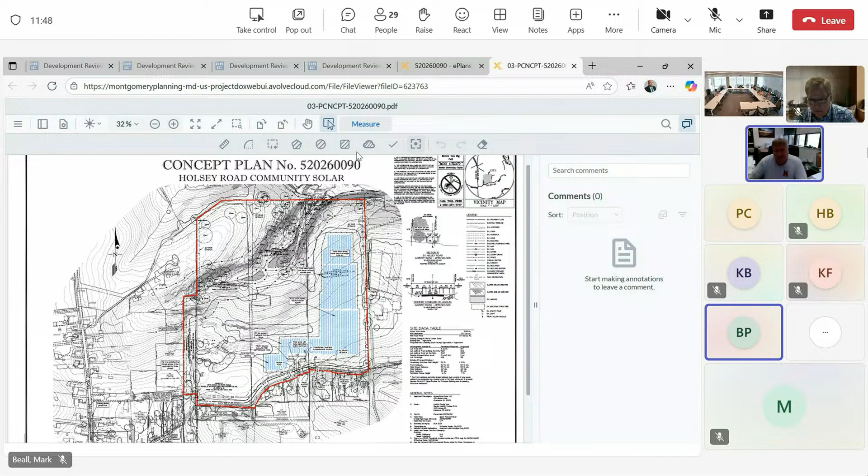This is Brenda with DOT. I think more than anything, this is just a clarification of what is existing. I don't think that you need to dedicate more; however, you do need to show a swale. It's just that the cross section that was provided was a little bit confusing.

Kevin, Keith, any questions about that? Yeah, we were just trying to clarify what was going to be required of us as far as dedications or anything else along Holsey Road. So I guess the question is, are we going to be required to dedicate right of way or not?

This is Rebecca from DOT. Is the road in the right of way? Currently, there is no right of way out there. All of the road is either on our property or on adjacent lots, but it's all prescriptive out there. So, well, two things: it's supposed to be a public roadway. Yes, so yeah, it is.

And so for it to be a prescriptive right of way, the county would need to take action, according to our attorneys. We would request that you provide the road in right of way along with a swale, so that if in the future DOT or anybody has to do improvements in that area, we have the right of way and the water is within right of way.

For DRC, it's a pre-preliminary plan in Up County, the Margaret M. Rast Trust property. Jonathan Casey will start.

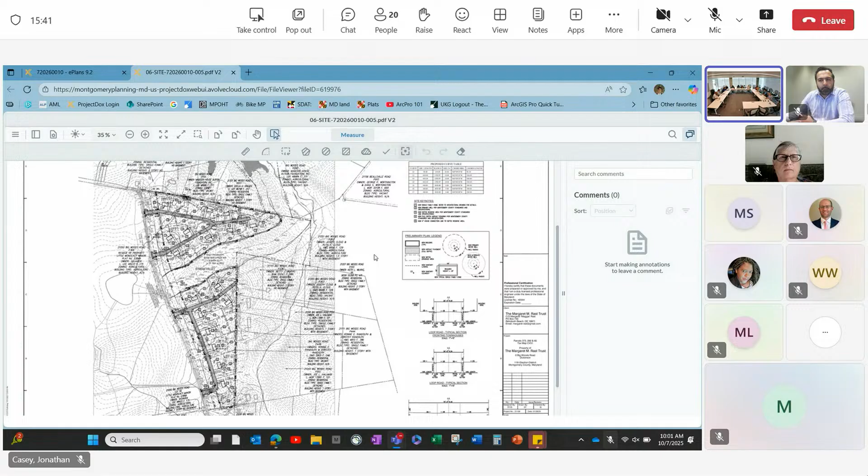Good morning, I'm Jonathan Casey with Up County. Just covering the basics, this is a pre-preliminary plan, but as we discussed on the phone, you're basically just looking for this kind of a feasibility study, looking at how many units you can potentially build here. We did have fairly significant comments on the layout, and I'm not sure you got all of them. We've been experiencing technical difficulties with E-plans, and not all of the change marks showed up on the PDF you received, so I'm not sure if you actually received all the comments.

There are a number of comments on sheet 5 from me that did not show up on that summary sheet. So if you want to start with reviewing the other agencies, perhaps DOT would like to get us started. Actually, I was hoping Mark Etheridge could. Or we can start with Mark Etheridge.

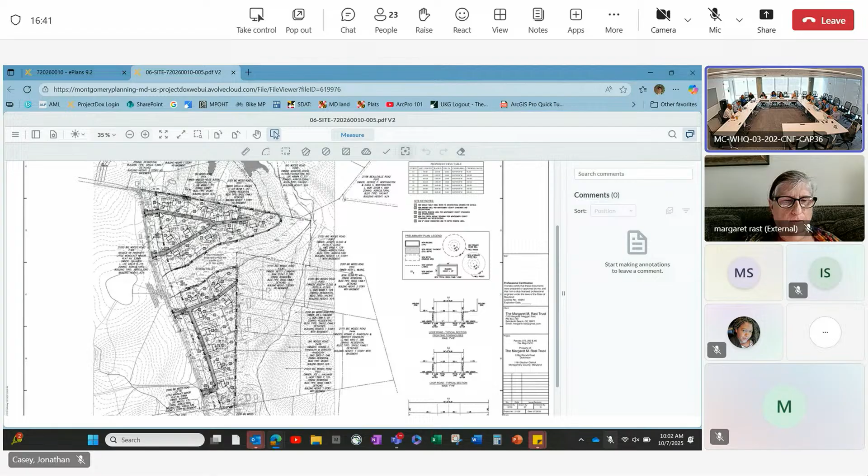Hey, this is Andrew Kohler. I don't think Mark's on today, but I can jump in for him on behalf of MCDPS Water Resources. So the layout for the stormwater management is problematic with the setbacks for the wells and layout. It will be difficult to provide full stormwater management based on that information shown, so that's significantly problematic. Thanks.

Do we have a well and septic on the line? Yes. There are a lot of updates that'll need to be made for well and septic.

I'm in the process of reviewing EMAD's last submission for water table testing, so I'll need to get some remarks back to him probably before the end of this week for a revised plan to be sent in. That's something that's kind of holding things up because the water table tests, well, more water table tests will need to be done, but they can't be done until early spring when wet season opens back up. Right now we're just in the process of trying to get a plan approved that will work, that shows potential SRAs, septic reserve areas that could be used, so that I can mark water table tests accordingly for that.

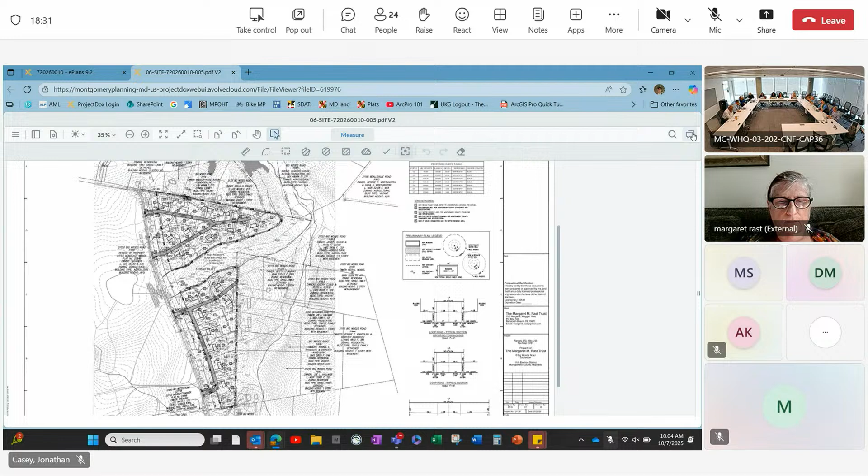Thank you. Marie? Do you just want me to report my comments? Yes, ma'am. Okay.

So as submitted in E-plans, I do need you to dimension pavement width and radii. The biggest thing on this is that you have dead ends greater than 150 feet without compliant turnarounds. You can send me a sketch or an email and I'll return a sketch on what those turnarounds can look like. You're always free to email me and I will return reviews, there's no fee associated with that. Your radii at your aprons for connecting to the main street appear to be inadequate.

I'm looking for at least 25 feet or a 35-foot driveway apron, depending on if you're doing private streets, you'll actually need the 25-foot radii. And then for water supply, you will be required to install a minimum 30,000 gallon tank with dry hydrant to serve this property, so that needs to be laid out. Again, feel free to reach out anytime and I'm happy to return reviews.

Thank you. DOT: you cannot do curb and gutter out here, it has to be swale. And you need to use the complete streets requirements.

Technically, you need to provide turnarounds for all roads, even if they're private. And I don't recommend the design, the additional roadways that you show just seem excessive for this area. So once you factor that in, a tertiary roadway is probably around 64 to 74 feet, depending on if you have sidewalks, per county road standard.

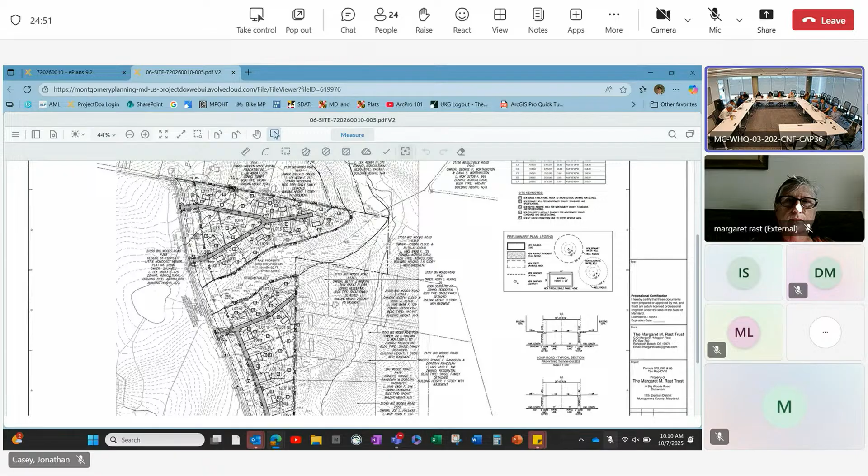If that makes sense. Yeah, and there's nothing keeping you from submitting another concept. Submit another pre-preliminary plan, unless you want binding advice from the board, or non-binding advice. A concept plan is your best route as far as processes moving forward, if you just want to bounce things off of the agencies. Also, the comments that didn't show up - if you go into each plan, you'll see a little red exclamation point. If you click on that, those comments do show up. Perfect, okay, understood.

This is Doug Johnson, environmental planner. I just need to highlight that since these lots are really constrained, you have to keep in mind that the septic fields cannot be within the stream valley buffers. Got it, thanks.

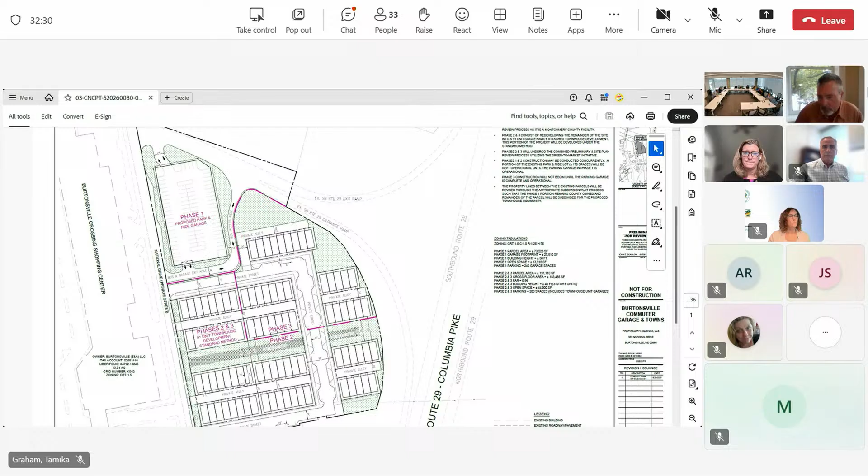Hi, this is Carlos from Planning and Transportation Plan Division. I think we still need to see some of the AutoTURN diagrams to make a more cohesive assessment, and an internal conversation is going to be needed to figure out the best possible design. There are several elements here that create a lot of very problematic conflict points between bus traffic, regular traffic, and potential residential traffic.

So, not to take too much time out of the meeting, but I would say that as it is currently designed right now, it is problematic just because of the creation of all of these conflict points, and also pedestrian conflict points.

This is Richard Brockmeyer. I'll just add, I think part of it would be understanding the dimensions of how they're being separated, and the crossing for pedestrians across that area. I understand trying to keep the width down, but also what is that dimension? Is there a refuge?

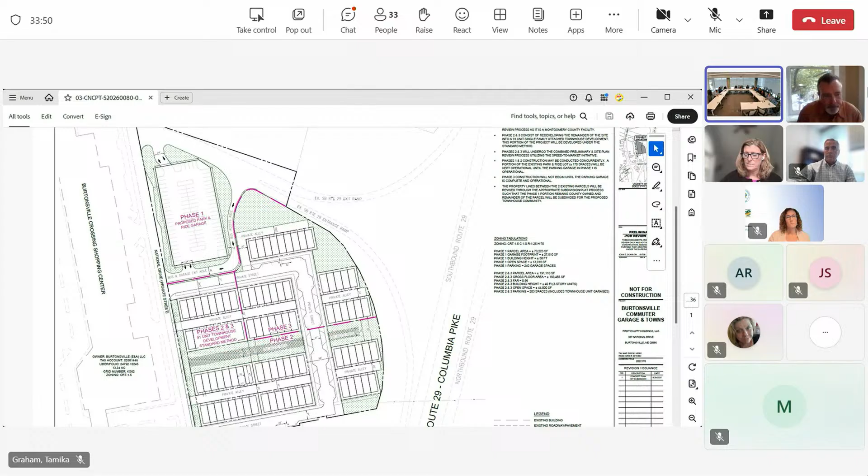So I think probably further discussion on that. Also, will there be a crosswalk as well too? I think I do see a pedestrian crossing between the towns and the garage, but how is that related to how will that navigation be visualized effectively?

Okay, that's helpful to understand. Aaron, just very briefly, I just want to clarify the noise analysis is needed at the time of subdivision because it would influence the layout of the lots. Yeah, and we're intending to do a joint preliminary plan and site plan.

And if I can just circle back on one item too, and this relates also to fire access. Please include us on the conversations if they relate to design for fire access, because I think it overlaps with our concern about the internal bulb outs for parking as well. We do think that the current design is a little problematic in terms of turning movements and also internal navigation for emergency vehicles within the private streets in relation to the fire access route as well. So, yeah, we just want to make sure that we're also hitting that point as well.

Yeah, and I actually, you're right, I had the bulb outs on my notes. Jack can speak to it. I think we're fine taking out the bulb outs. And then we were talking yesterday about improving the turning, because we did get that comment from Marie. Yeah, so we know that's something that we'll be working on.

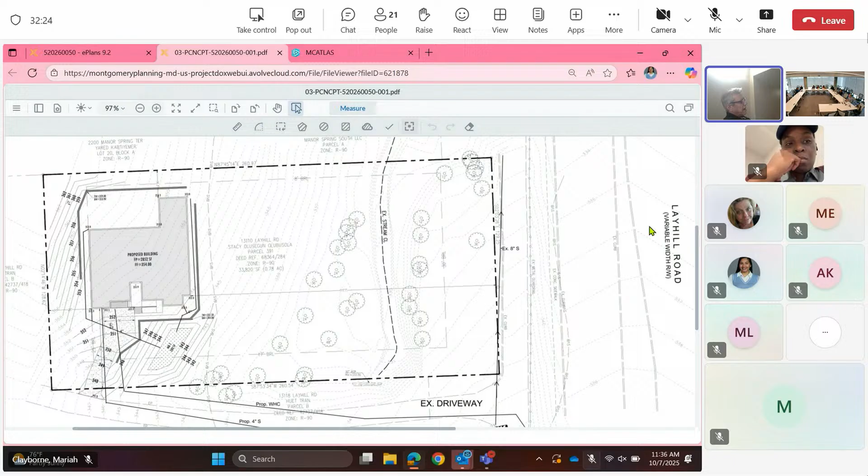I don't think well and septic would work on this project anyway. With the zoning categories W1, S1, it might require an extension, or the water house and sewer house connections will have to be extended to the line near Layhill Road, but that's kind of what I was thinking, that's how we would have to do it.

This is WSSC - yes, it's partially in the correct category. It's water and sewer category 1, so they can get connection to the public system. And yes, you'll need an extension, especially for water.

Yeah, we can't really hear you. Is it possible to clear the mic so the comments can be clear? Could you please repeat your comments? We had a hard time hearing you. Can you hear me now?

Yeah, much better. I was trying to see what is wrong with the microphone. There you go, yeah.

This parcel is in the right category - water and sewer service category 1, so they can get service from WSSC. For the water I think we need an extension. For the sewer, I will need to confirm that it's going through a WSSC easement, because you will need to cross a small part that I think is private. So I don't know exactly how we will do the sewer house connection, but you can do it.

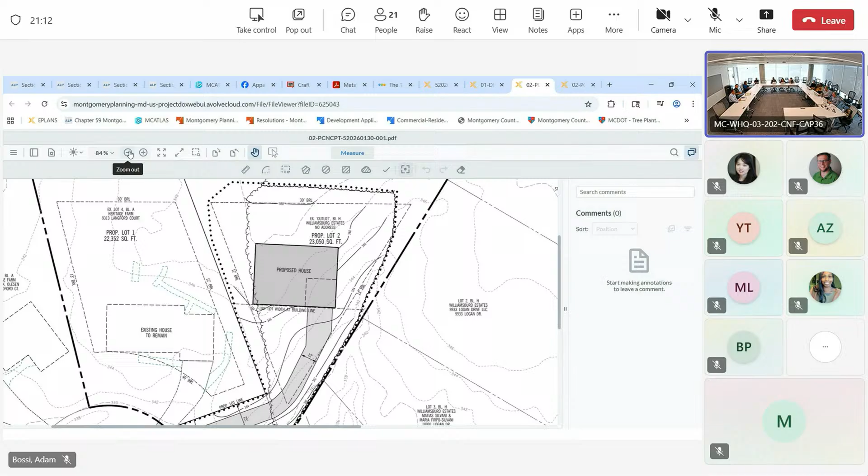One more question about the island. I just have a note that the island cannot be more than 30 feet in diameter. So if it actually is built with more than 30 feet of diameter, what would be the implication of that on our project?

Are you referring to down here in the roadway? Yes. Yeah, I think that was one of Marie's fire access comments. Right. We may have to look at trying to do some type of turnaround, possibly partially with our new driveway, so essentially a fire truck could come in and do a 3-point turn. Okay. Or modify the island—this would be the other option.

I don't know if we had anything else. Did you have any other questions? No, good. I guess we have a few follow-ups to do with a few of you. We'll get in touch within the next few days so we can get those answered as well.

Yeah, I'm happy to follow up on those questions regarding the concept you shared yesterday, and then with the question about the dedication—how that might affect things if there is dedication needed along the front of existing lot 4, what does that mean in terms of the house setback and conformity? I'll look into that and get back to you. Sounds good. Thanks, everybody. All right, thank you.

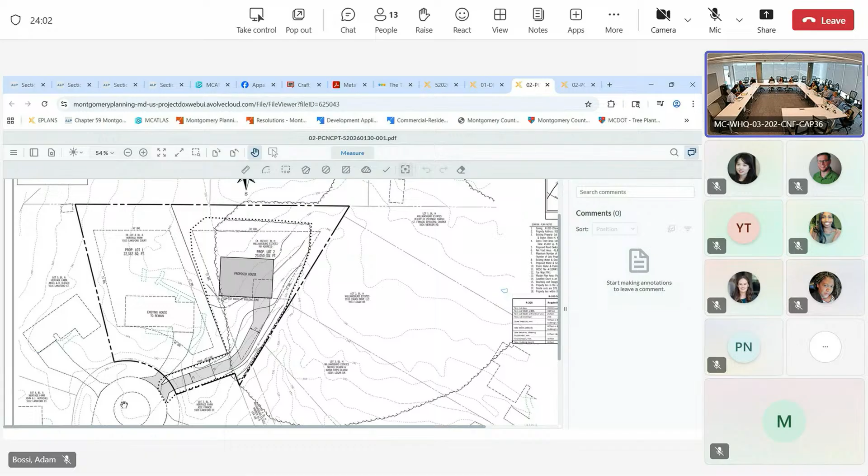So we have to condition it appropriately, that if it was waived, then no dedication is required. If it wasn't, then they have to. You have to show the swale, and the swale would determine whether the sidewalk goes and if you need additional dedication.

My understanding was it would require dedication regardless, the PIE cannot be taken without any facilities. That's what I was wrong about. No dedication, technically easement. The easement is, if we ask for an easement, we won't do that if there's no facility.

The solution is instead of just PIE, we can make it PIE, PAE, or a combination of PIE and PAE, but that's if we have a facility. It's a little complicated - PIE is just for maintenance, it allows DOT to maintain the facility. If there's nothing inside it, why would we get a PIE? There's nothing to maintain. But if we change a document that says it's accounting for public access and maintenance...

Which basically makes it dedication. Exactly, or at least in part - well, our attorneys will make that determination. But from a zoning standpoint, if there's an easement which would allow access for construction and maintenance, would that affect setback for a house? Perhaps not.

So if that's an issue with dedication, that might be another avenue. Right, but if there's no facility, then you can't - if there's no facility, then we won't accept it generally. Okay, something for the attorneys to look into.